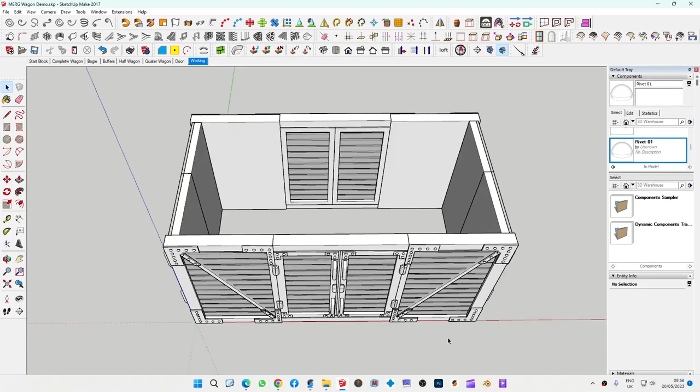Right, we'll come on to the roof part, but it makes a better print if you print the roof separate. We'll need to make a locating piece on the top, so let's use the rectangle tool in the corners.

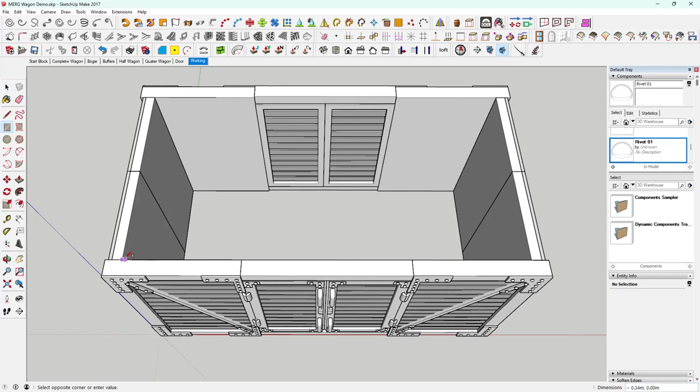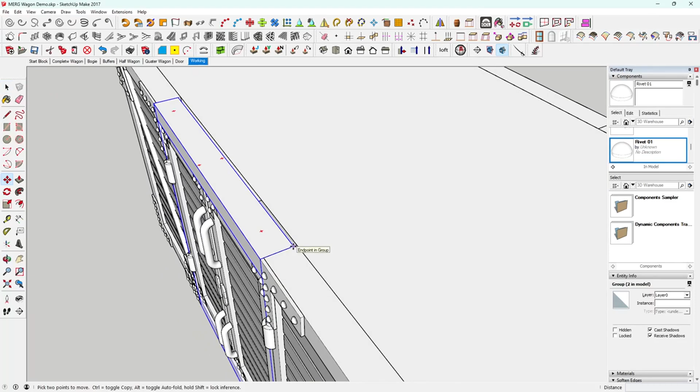Just to draw a square. That doesn't look like it's flush at the top there. Obviously I've moved that into the wrong place, so we'll have to move that over a tad. There we go, I'll put it on the back bit, sorted now.

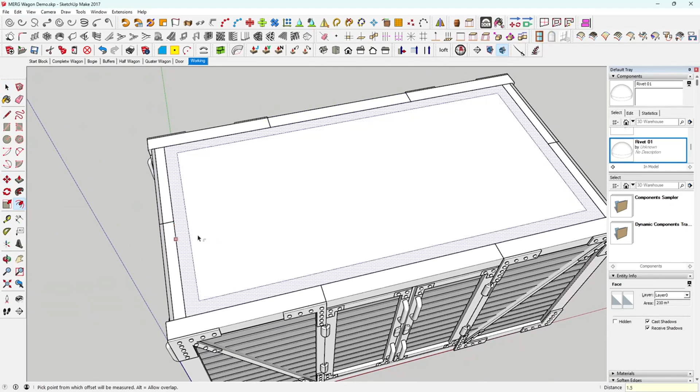Rectangle tool, and then we'll offset that. Offset tool, click on, we'll do 1.5 mil. That should be enough to locate it.

Click on the middle, delete that, and then we'll bring this down. We don't want to go too far because we don't want to obstruct the doors, so we bring it down to the level of the bar we put on.

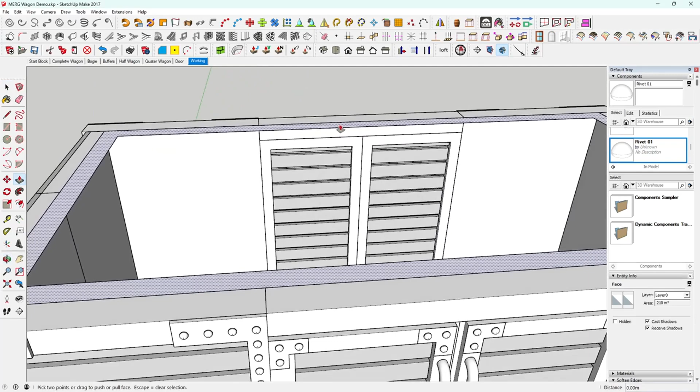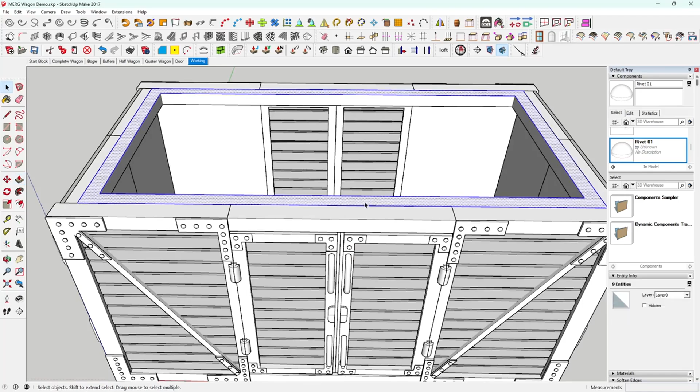If we come inside we'll probably see it better. What is it, 1 mil I think? If we come down, there we go, 1.5 mil. Yep, and this will be our locator for our roof. So triple click, right click, we'll make that a group, and then we can put our roof on.

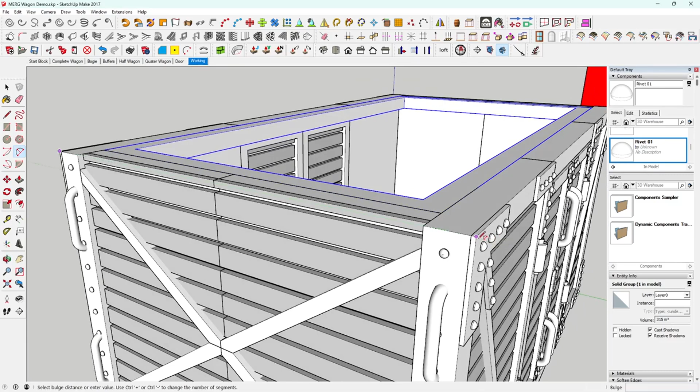Going along there. So what we need now is the 2-point arc tool. We'll click on, it doesn't really matter, we'll click on the far edges, and we'll click on this edge, and then we'll go up on the blue axis and up, and we make a roof shape.

5 mil I reckon. Let's try 5. Is that about right? That's about right.

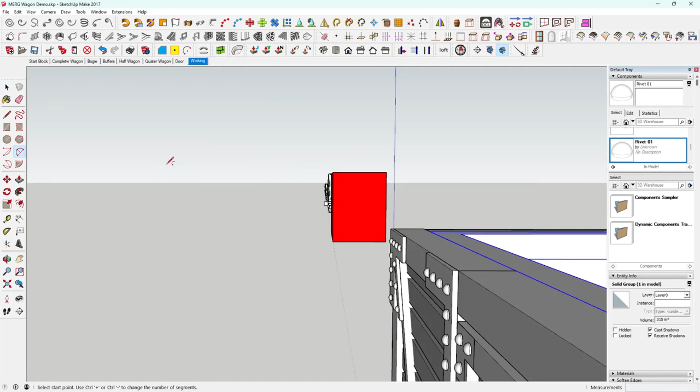And then we'll come in, we'll use our pencil tool, and we'll come along the edge, and we'll draw that in, get a face.

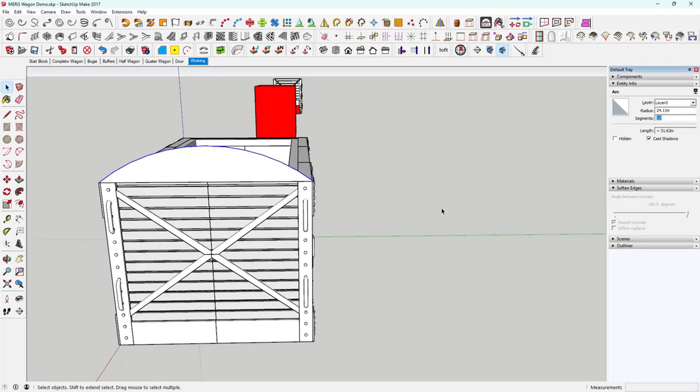If we click on this arc we just done, we'll go to entity info. It's got 12 segments, a bit rough, so we'll change that to 40, and that will give us a smoother curve without going too mad.

Yep, that's good. Now if we copy that face, then what we can do is do another arc.

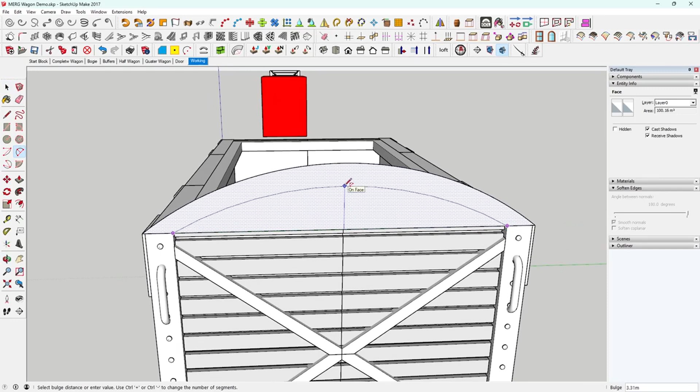Actually, if we do the arc from that edge there to that edge there along the blue, till about there, click on that face, click on that edge we just drew. This will save yourself a bit of filament.

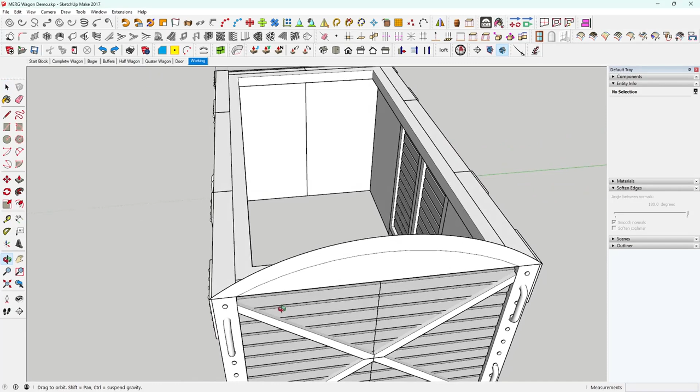No, it won't come over to the edge. We'll do a Control Z, forget that one, because we'd have to bring it too far in, it wouldn't save much resin. No, we'll make it as a solid.

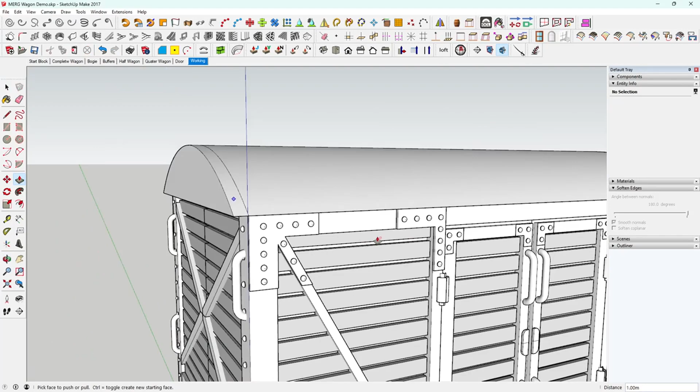We'll click on, and then we'll pull it across to cover the ends. It's entirely up to you. If you have an overhang, do a Control, pull it out one, and then same on the other end, Control, pull it out one.

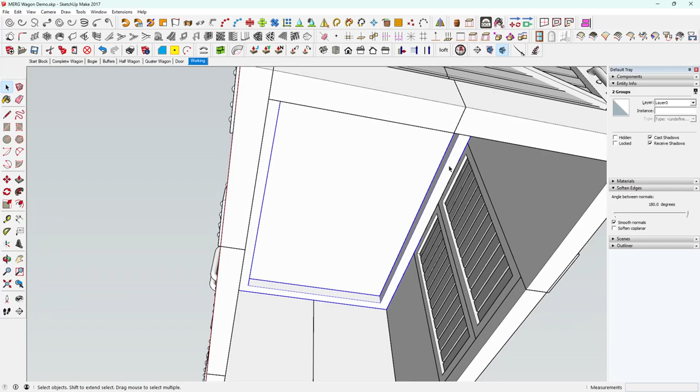Yep, that's good. So triple click the roof, right click, we'll make that a group. Also we'll do a Control with the guide one, our guide square underneath, and we'll right click and make that a group. So we've got them two as a group now.

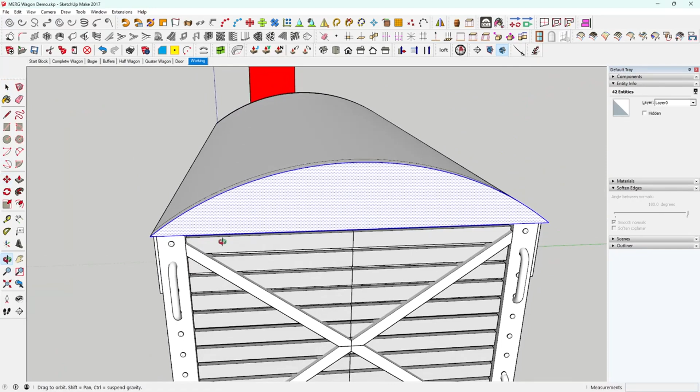If we do an edit, paste in place, and that was our face. We'll have to move it along a bit now, we can't see it. There we go.

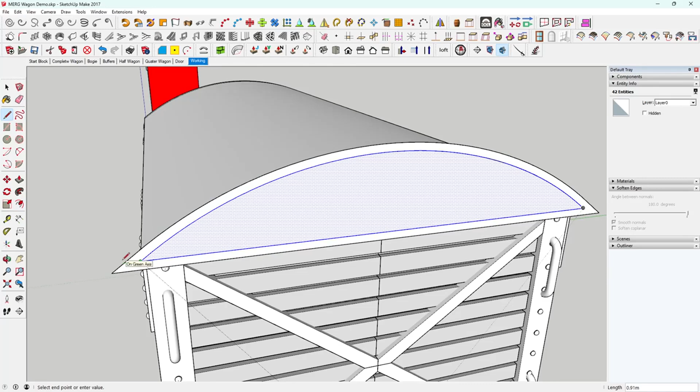Now what we need to, well I don't have to do it, but I like to put some bars across the top, give it a bit of detail, I suppose, more than anything. So what we can do is use the offset tool, and then we'll go out at say 0.5.

We use a line tool, we'll come across, make sure we're going on the green axis, and we'll click along the edge, along the green axis, and then we'll get rid of, use the eraser along that edge and along that edge, and then we'll push pull that edge along.

So obviously it doesn't want to pull that face, so if we do a Control and pull it, it'll generate a new face, and we'll do 0.5, and there we go.

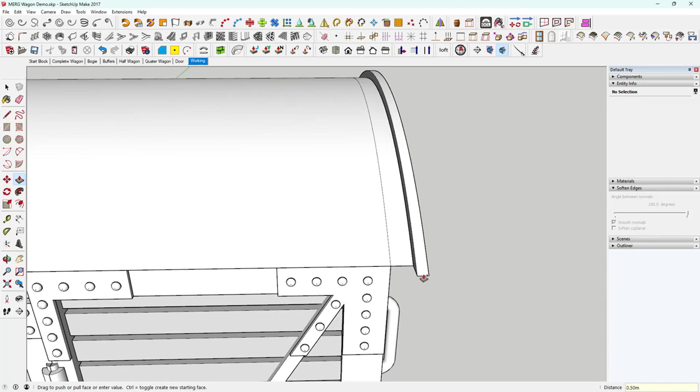I don't know if they use what they use these for, but we can get rid of the middle bit, so we'll click on the face, click on that edge, and we'll triple click this bar, we'll make that a group.

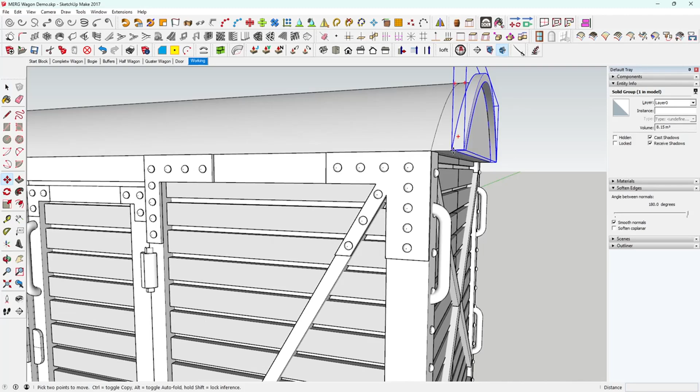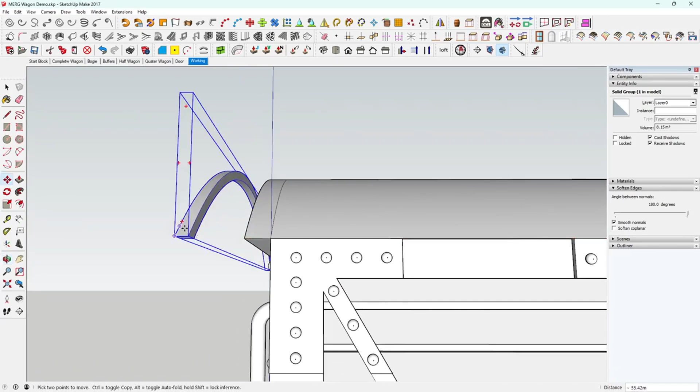And I think we'll offset it a bit and move it along the red, and then what we can do is move it along, do a Control along the red, move that along to the other end, so I'll get it in the same place, back along the red. Actually we'll do that again because I want to duplicate it, so we delete that.

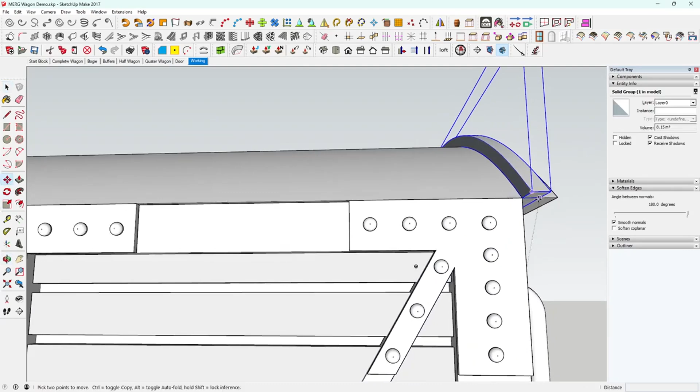Make sure I pick the right piece this time. We'll click on this edge, do a Control, red axis, go along till we find the end, and then we divide by 3. That looks about right, doesn't it?

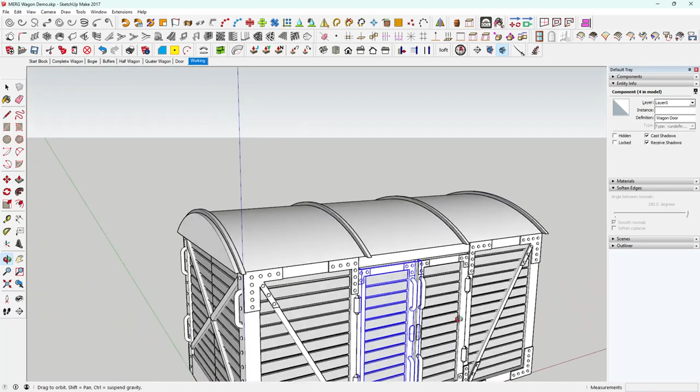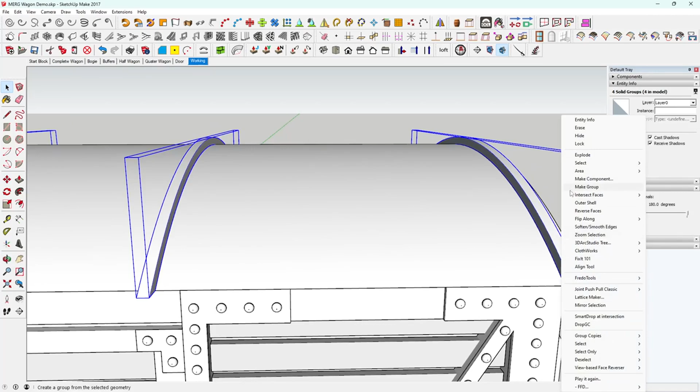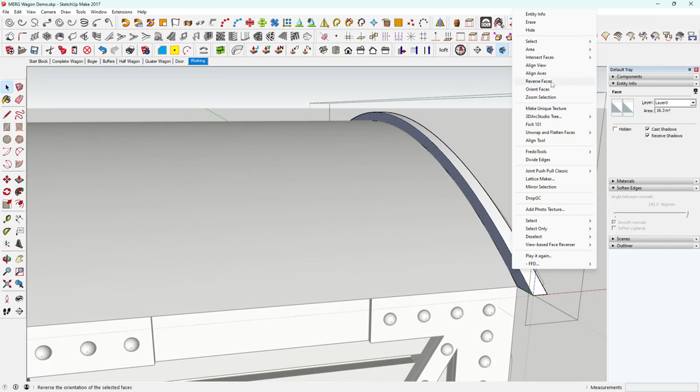But for some reason that's a reverse face, so what we can do is click on all of these. If we right click, can we align faces? No, it won't let us do it. So really, in theory, we should go back, do a Control Z, and then come back, orientate. I didn't spot that face is round the wrong way. It's not good. Reverse that face. It's not good procedure, you've got reverse faces.

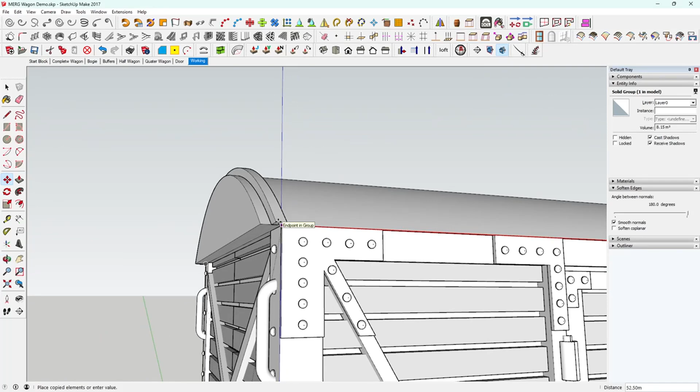So we'll start again on our duplicate. Click on the corner, do a Control, red axis, and divided by what was it we did? And that's better. You can put them anywhere you like, and then we'll click on all of the bars.

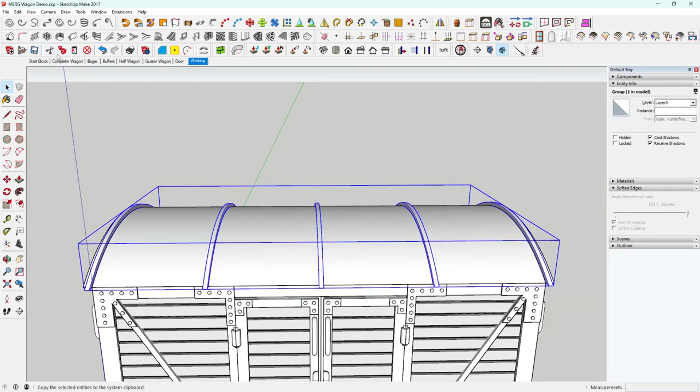Right click, make a group, we'll cut that group, we'll open the roof group, edit, paste in place. It's basically basic roof, so it depends if you want these on the end, overhanging, or what you do with it. I mean, you can put a wooden end on this even.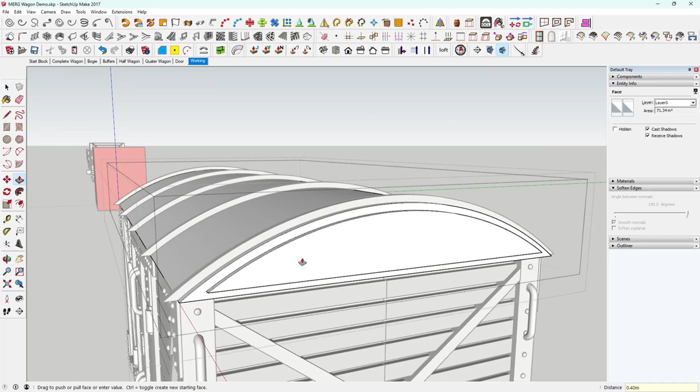Let's put a wooden end on the, highlight the roof. We'll offset by 0.5, half a mil in. We'll click on this end and we'll push it back. Actually we won't have it flush, so we'll go about 0.4, enter, do a Control Z because it comes back our way, we'll click on, move it back, 0.4, enter.

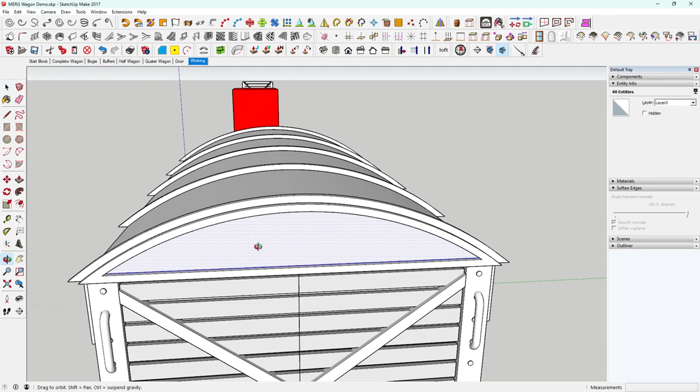We'll do copy that face, and then we'll click away from the group, and we'll do edit, paste in place, and then we can go up or down or left to right.

Let's try it. On the face, along the bottom, we'll go to Oob and we'll put wood cladding in. No, I think we'll cancel that.

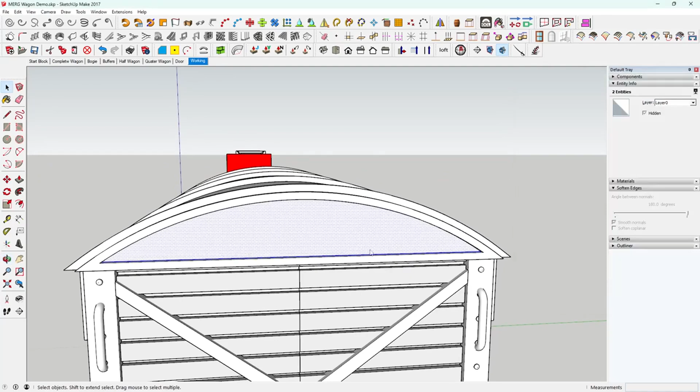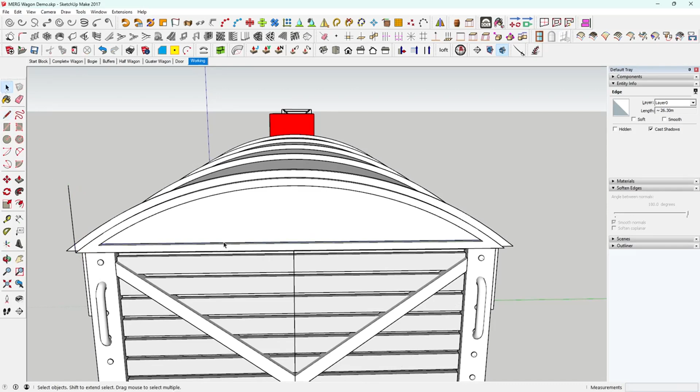And then what we can do is, we'll have to, because it's an arc, we've only got one straight edge just along the bottom one. So if we just draw a line anywhere you like, up on the blue, and then we click on our face and we click on this edge, and then we do our Oob, it should go up and down. There we go, because it uses this reference point to make it go up and down.

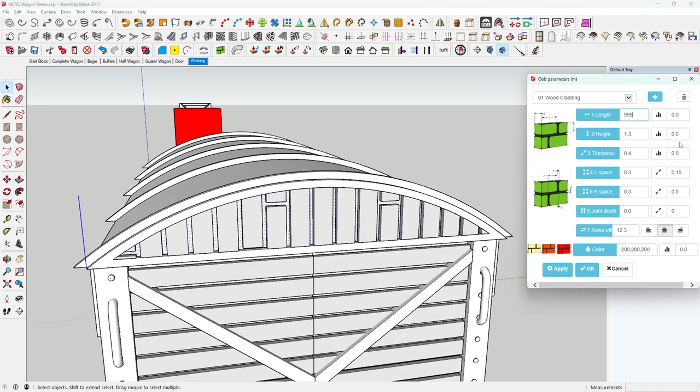We can delete that reference point now, or we'll make this 999 again, and then we'll press OK on that, and you can delete that reference point there.

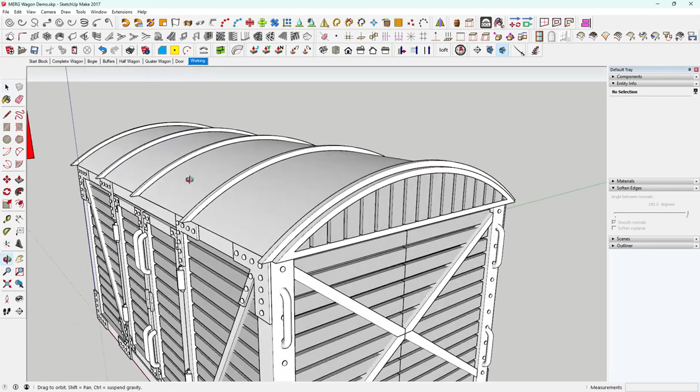We can copy that. Actually, we'll cut that. Open the group, edit, paste in place. Now, if it was clever, I would have cut the roof in half and done it that way, but because I adjusted it after, change of plan.

So what we need to do is the same on the other end. I mean, we can cut it in half, or it doesn't take a second to. Click on the end, offset 0.5, half a mil, and then we pushed it back 0.4.

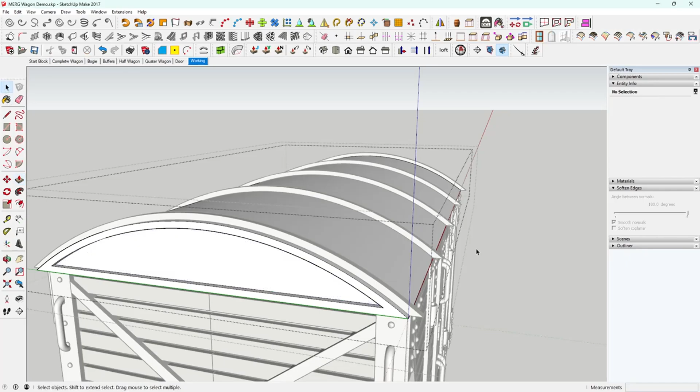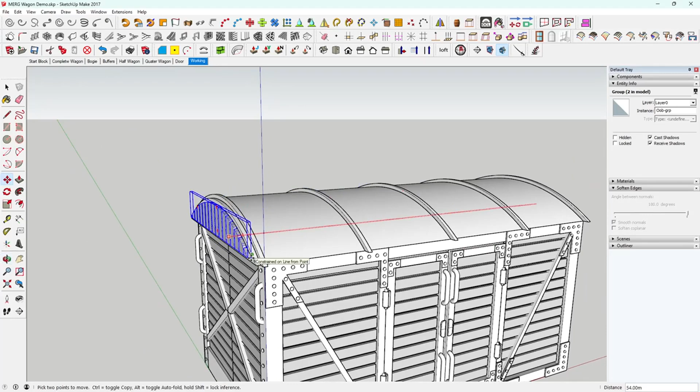All good for that. And then we can do edit, paste in place, because that's our planks for there, and we do a move along the red axis, and if we're clever, click on the red, and we should inference off the front.

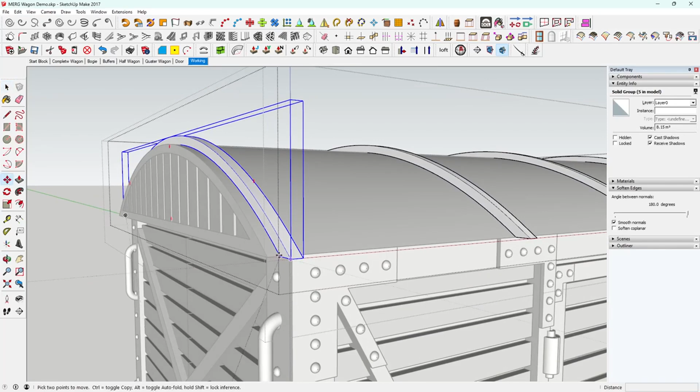I think these really should be moved along a bit, shouldn't they, to the end. So move that along the red to the end. That looks a bit better.

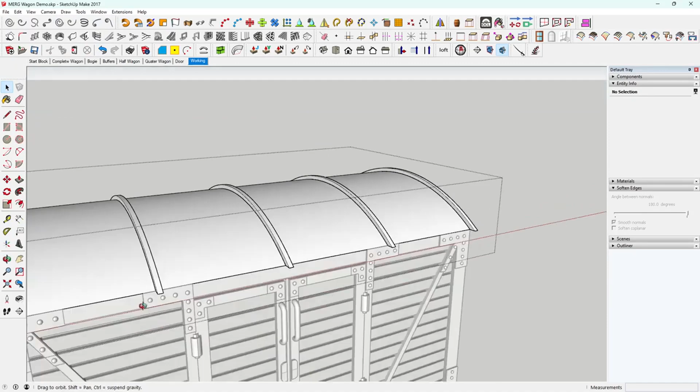We'll click on the wood, we'll cut that, open the roof up, edit, paste in place, and then we'll come back along the end. You can tell I'm making this up as I go along.

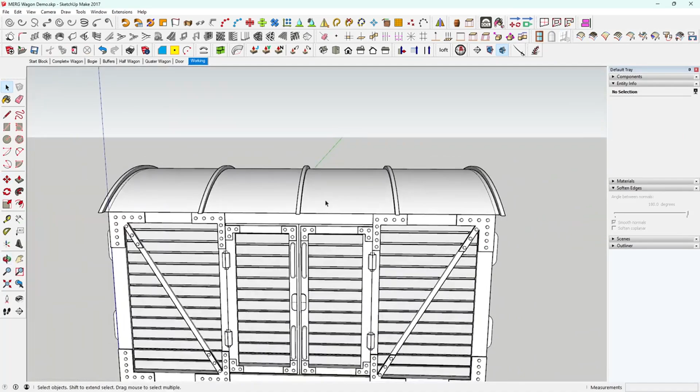Right, we'll open this group, we'll click on this one, this roof, whatever it is, along the red. Right, and there we go. And there you go, I would say it's not too bad a roof.

I mean, really, you can overhang it a bit more. I'm not sure how it all works, but it's the technique I'm showing, not the actual prototypical.